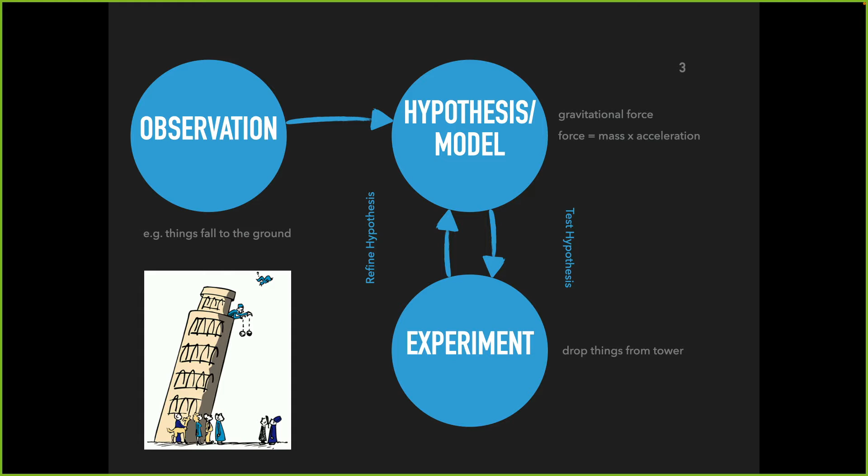So when you hear the theory of the Big Bang, it's kind of already been demonstrated or hasn't been proven wrong yet. So you proceed to do experiments to validate your hypothesis and try to disprove it, see where the limits are. You know, like drop things from a tower. Who was the guy who did that? Galileo, was it Galileo? Yes, Galileo. And by the way, then you refine the hypothesis. As you collect data, maybe there's an error here, maybe these are the limitations, maybe you cannot drop things from way up in the atmosphere or whatever.

Now, by the way, this is called the Tower of Pisa, not pizza or piazza. So it's the Tower of Pisa. Not pizza or piazza.

Okay, great. This sets the stage that to do science, you need to do experiments and you need to observe reality. And that's really true, and that's been true since the birth of science. However, how do you experiment on an exploding star, for example? It's really very dangerous. Nobody experiments on blowing up, doing supernovas at the university. You can't do that. Not only is it very dangerous, probably you cannot do that.

So how can you run an experiment? How can you study an exploding star? You can observe in the universe, but have you seen those pictures from even the best space telescopes? They're like 3 pixels. And they tell you, oh look, there's an accretion disk over here. And I was like, how do you see that? It's like 3 pixels. And we're like, yeah, you know what, this is all our theory, what it does. But it turns out that those pixels and whatever they're seeing are actually based on what we're going to talk about here today: simulation, simulation science.

So how do you experiment on a hurricane? You could do a scale model, but it's really hard to do a hurricane in a scale model. So it's easier to do it on a computer. How do you simulate a nuclear accident? You learn from history, because it's unethical to start a tsunami, for example, to cause a nuclear accident. It's dangerous. How do you experiment on a coal boiler? Something as simple as a coal boiler is really hard to instrument, because your instruments will burn instantly. So how do you get measurements and readings? Flameless combustion - I didn't know that this was a thing until like 6 years ago.

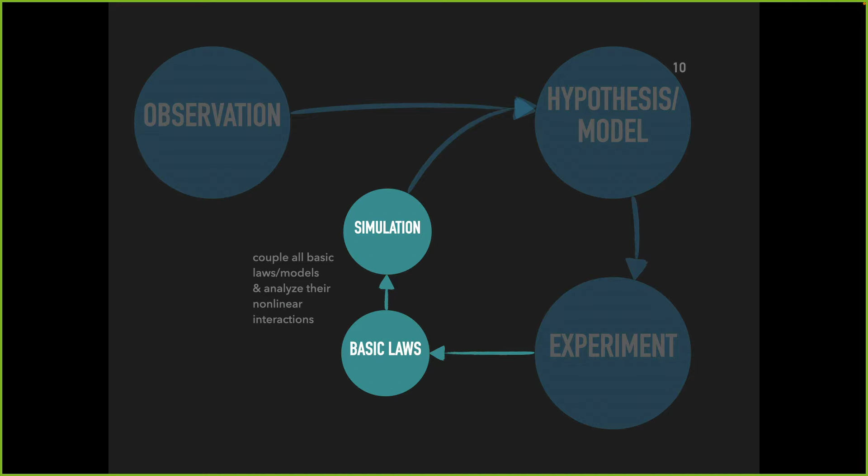That is where simulation comes in. It couples all the basic laws and models that you've deduced from your experiments and hypotheses, and you analyze their nonlinear interactions. Obviously there's a lot more that goes into it, because you need to make sure that the simulation is actually giving you realistic results, and we're going to talk about that a lot in this course.

More and more, this is generated by ChatGPT: it says theory is the first pillar of the scientific method, experiment is the second pillar, and finally scientific computing or simulation science is the third pillar of the scientific method. This is a testimony to the power of computing, really—it used to be just these two, theory/analytical methods and experiments.

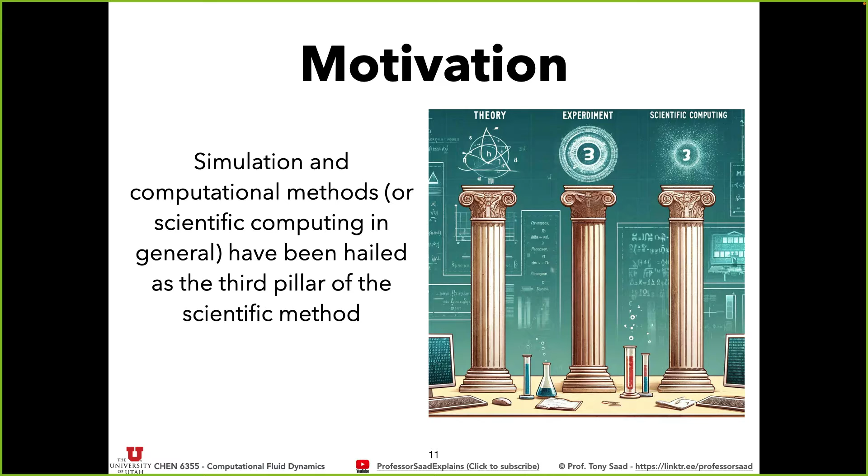Now, when you think about simulation, there's no simulation that touches your heart and your soul better than a fluid flow simulation. Seriously—why? Because it's in our veins. There's fluid in our veins, we move within fluids, the air, the water. You see a fluid simulation, it's beautiful, it's mind-boggling. That's why I love CFD too, because I want to make some cool simulations.

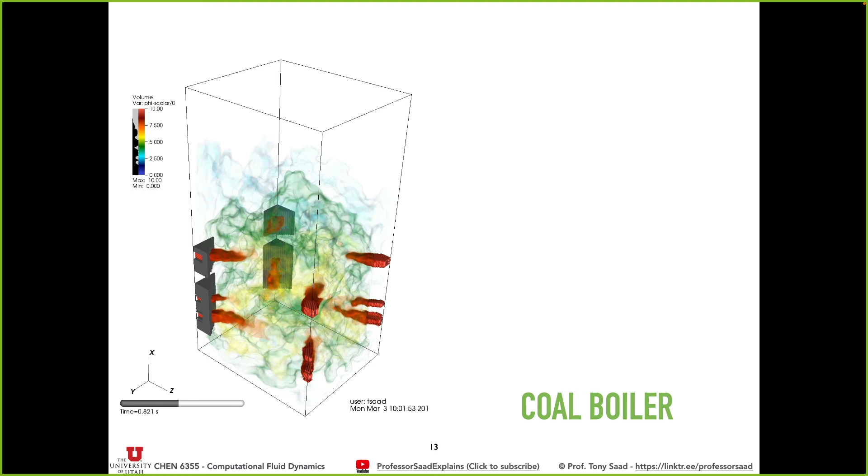I'm going to start showing you some eye candy, some of the work that me and my colleague have done over the years. This is an actual simulation of a coal boiler downtown that we were doing. What you're looking at here are injectors—these colors represent coal particles entering the domain. They're diluting, so the color represents concentration, and they're diluting and also devolatilizing and burning subsequently.

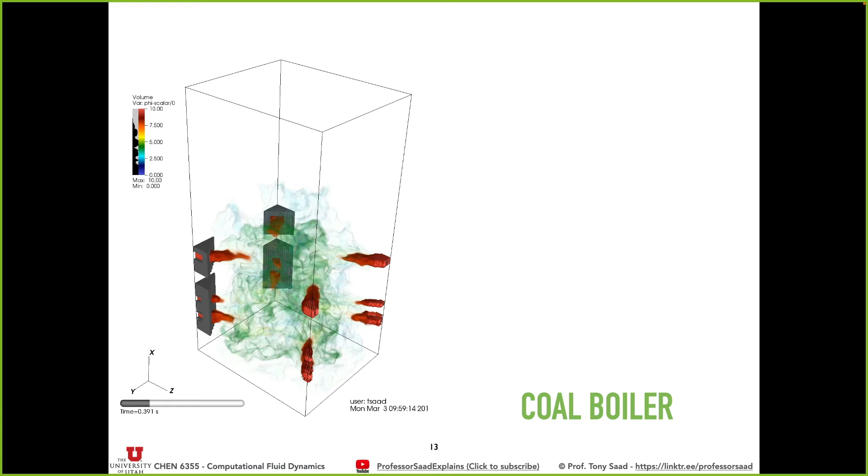So they come in—this is a 3D volume rendering. You don't see much, it doesn't look super nice. But what I want to do is take a slice over here on this plane. If I take a slice down there, we were able to get a picture of what we call the fireball inside the coal burner. These are tangentially fired streams with coal particles that come in, devolatilize, and burn.

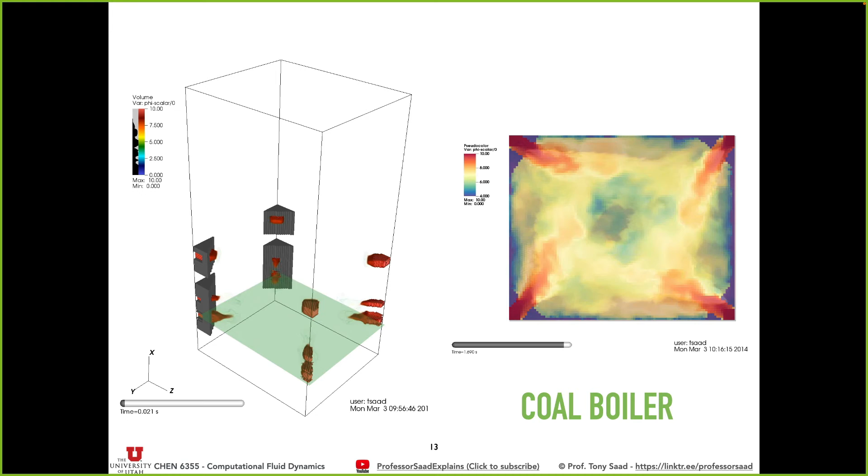And quantitatively, it is actually right on top of it. So we got that right. Isn't that cool to do something like that? That's pretty cool.

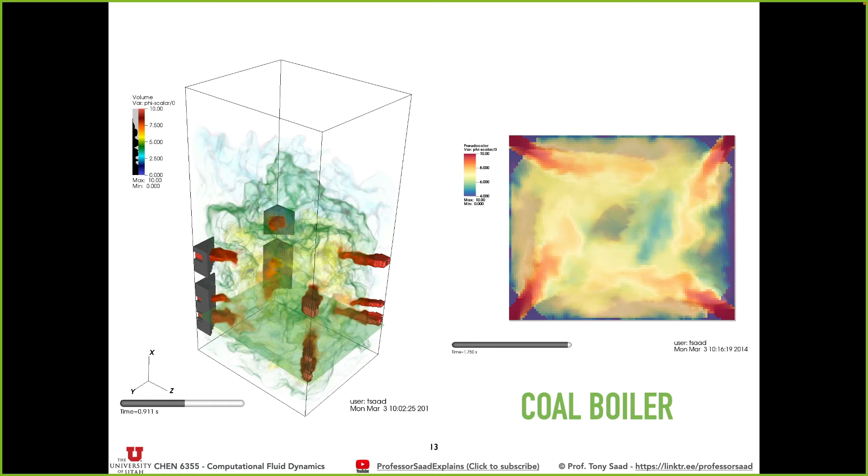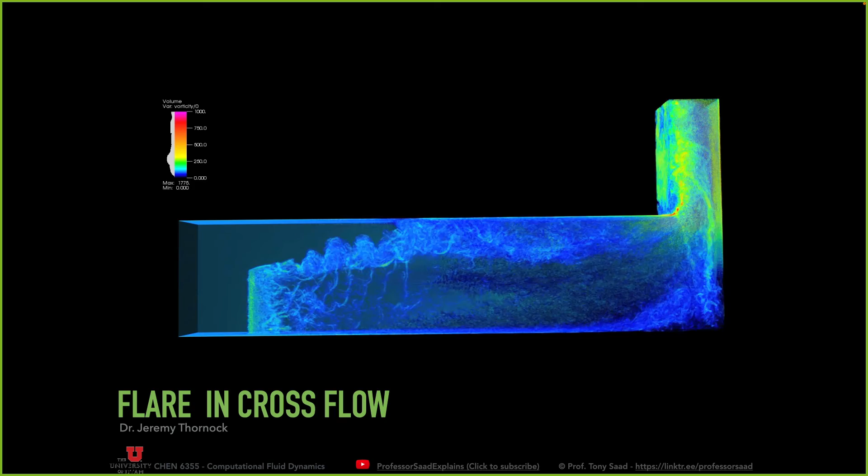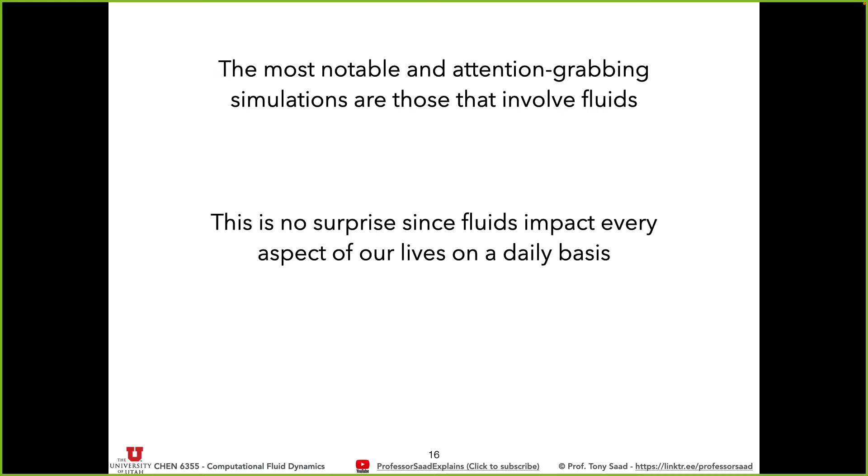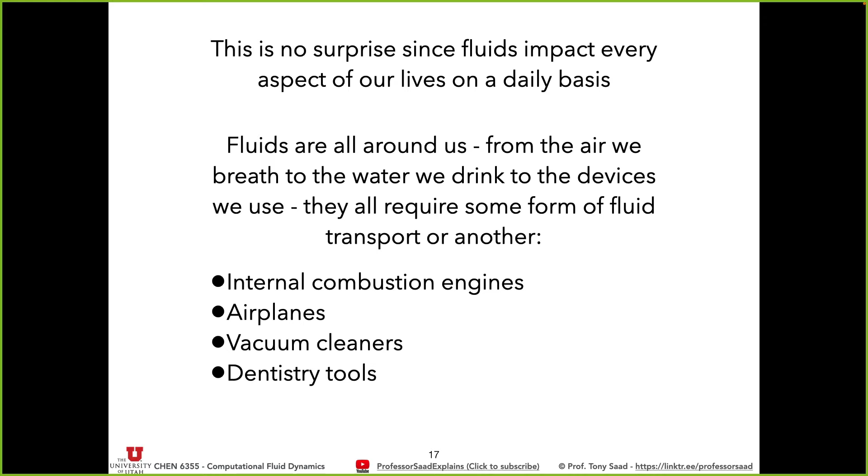Now it's no surprise that we like fluid simulations because fluids are in our veins, right? They're everywhere around us. I like this list: fluids are in internal combustion engines, around airplanes, in vacuum cleaners—I don't know why I chose that model—dentistry tools (I've been doing some dental work recently, so that was great inspiration), pressure washers and cleaners, coal boilers, etc.

So why do we need computational fluid dynamics? Beyond it being so cool, and I do CFD, why do we need CFD? It's because the behavior of fluids is very difficult to study and predict.

For those of you who took fluid mechanics with me in the fall, or even undergraduate, you recognize this is a complicated discipline. Nobody really understands fluids—it's like quantum mechanics. If you think you understand fluids, you don't understand fluids. There's so much complexity, yet the equations look somewhat benign.

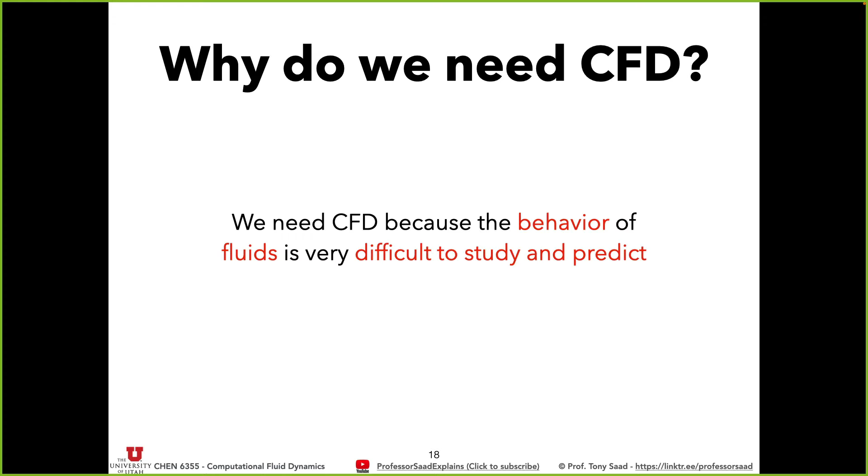But they're very complicated to predict because the equations don't tell us the story of what will happen in reality. They just have convection, diffusion, and pressure terms, but it doesn't tell you how to form a Kármán vortex or show reversible flow for Stokes flow. You can't see that directly from the equations—you have to set the problem up.

Now, since fluids are at the heart of many things, fluid mechanics is an important field to study. There are three ways to study fluids: theoretical, experimental, and computational. That's the scientific method, but now we're adding computational. We'll go through each one, trying to set the stage simply.

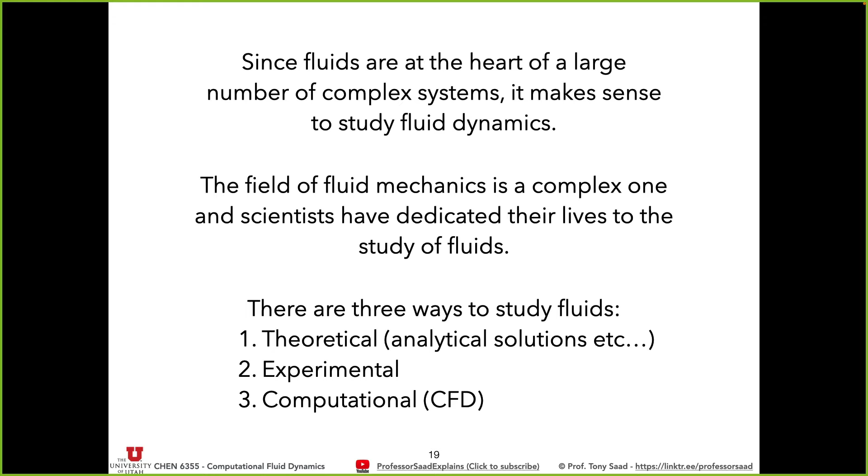Analytical methods are limited in scope to simple geometries—like approximating the chicken as a sphere and seeing what happens, or the giraffe as a cylinder. So limited geometry, but very insightful. Poiseuille flow, one of the most important results in fluid mechanics, tells you the relation between pressure drop and flow rate—it's a simple approximation like an infinitely long pipe.

Is it close to reality? Pretty darn close, but we have to add corrections to it. Still pretty useful, but that's the limitation. If you're trying to study the complex blood flow in your veins, Poiseuille flow isn't enough—it's more of a back-of-the-envelope calculation you could do while flying in an airplane. Anything more serious, you can't use analytical methods.

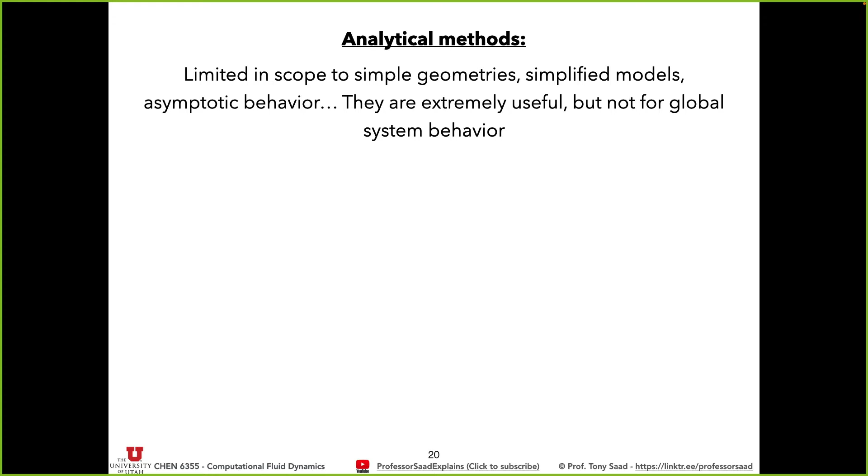Experimental methods are the most realistic—they're the truth, more or less—but can be expensive and sometimes dangerous or impossible. Like the example of the supernova—I really like supernovas—you can run a simulation of a supernova, and you can't run an experiment to reproduce one either.

Finally, computational methods are kind of virtual experimentation based on first principles. Remember the picture of the scientific method with observation and basic laws? We take those basic laws—mass conservation, momentum conservation, energy conservation—and put them together.

We turn those equations into something the computer can handle—little differential equations, finite differences, etc.—and then try to solve them. Now, they also suffer from numerical errors. There are formulation problems and other headaches that we will observe in this course as well.

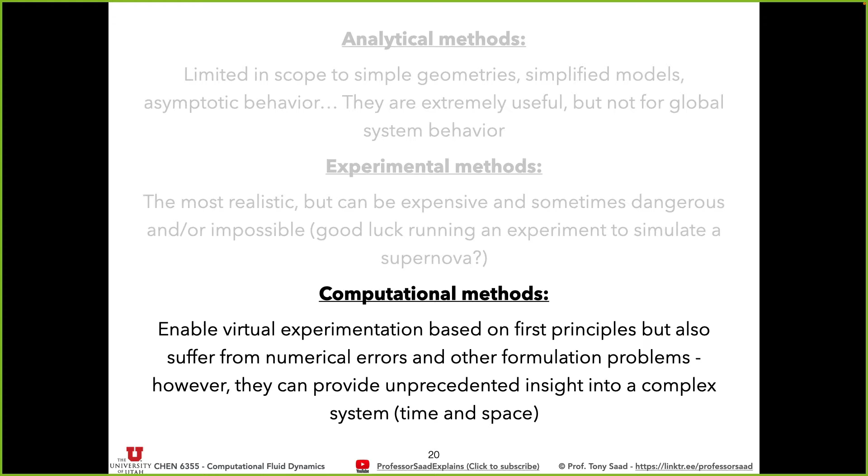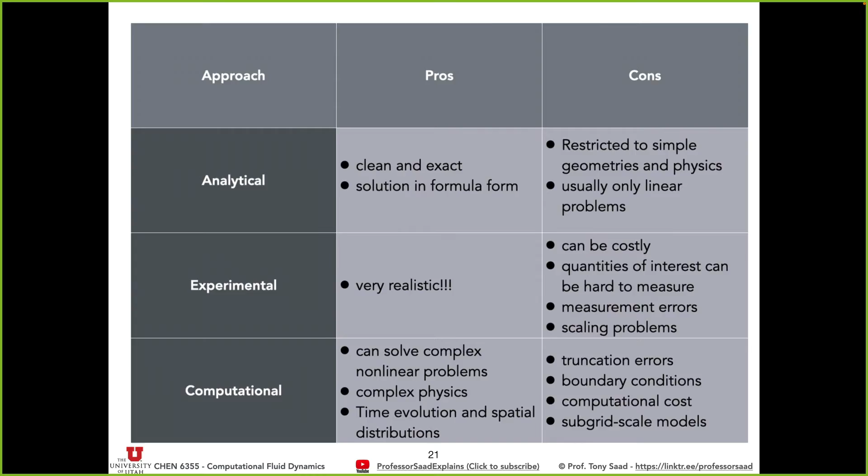And then you ask yourself, okay, what is CFD? Again, a picture generated by ChatGPT. I told ChatGPT, I'm teaching an introductory lecture on computational fluid dynamics today. In your opinion, what is CFD? If you want one image to describe computational fluid dynamics, what would you produce? And it produced this thing. It's pretty interesting. I don't know what's going on over here. Some weird multiverse thing going on, but okay.

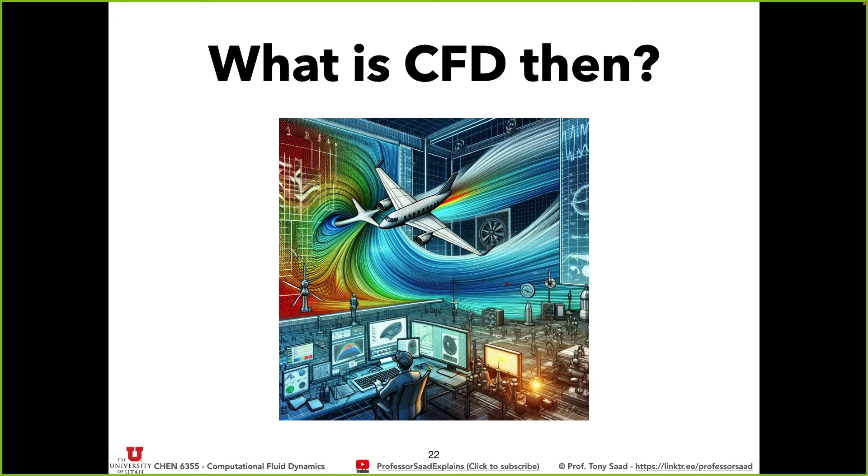There's a great definition that I take from Professor Gretar Tryggvason. He's a great teacher and educator of CFD. He was the former editor-in-chief of the Journal of Computational Physics, and a very dear friend. I learned a lot from him.

He says that CFD consists of computing multidimensional flows, 2D or 3D flows, by solving the Navier-Stokes or Euler equations. These really are the two sets of equations that we will be dealing with. Navier-Stokes could be fully compressible or incompressible. The Euler equations are just inviscid.

The Euler equations automatically, because of lack of viscosity, will form shock waves. When we get to that in the second part of the lecture, I'll explain how a shock wave gets formed in the lack of diffusion. If you think about it intuitively, diffusion tends to equalize things, just smooth things out, and convection is trying to move things very quickly. When you take diffusion out of the fluid equations, you just have advection. Remember in fluids you had this term multiplying the velocity by the gradient of the velocity, and that term tends to form shock waves. It's like moving the fluid in two opposite directions, and it forms a shock wave, or starts creating things that are spinning.

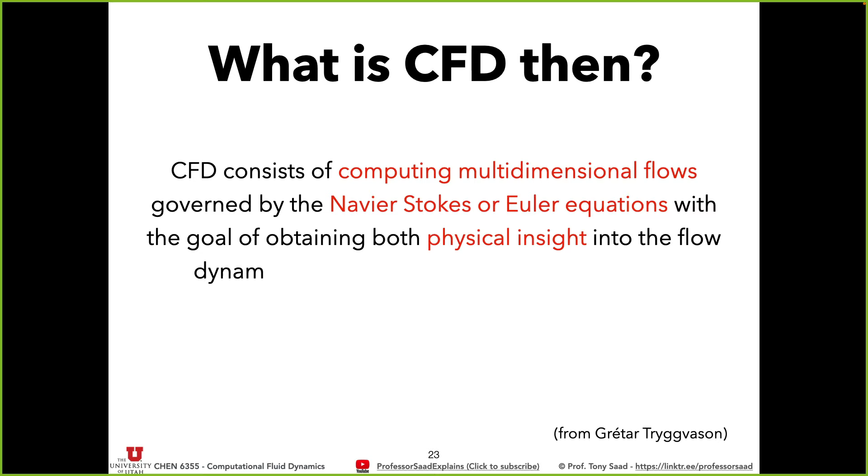Okay, let's go back to this definition: the Navier-Stokes equations, Euler equations, with the goal of obtaining both physical insight into the flow dynamics and quantitative predictions of engineering flow systems. Now, CFD is one part of a bigger picture. It is the most popular, by all means, because it is the most captivating, right?

You could show a molecular dynamics simulation, these particles that are just wiggling, these molecules moving in place, and it's not relatable, right? You see a fluid simulation and you're like, oh my gosh, this is beautiful. So it's just very popular. It became very popular, but it's part of a bigger umbrella of scientific computing, where you could have solid mechanics simulations, simulations in chemistry, physics, material science, etc. Fluids is scientific computing. CFD is scientific computing applied to fluids.

Now, we anecdotally call everything CFD, even when we're doing solid mechanics. They're just doing CFD, they're just doing CFD. And sometimes I call someone, I like your CFD. No, sir, this is molecular dynamics solving the Boltzmann equation. It's just all CFD, and so, yeah, I like to mess with people that way. But, okay.

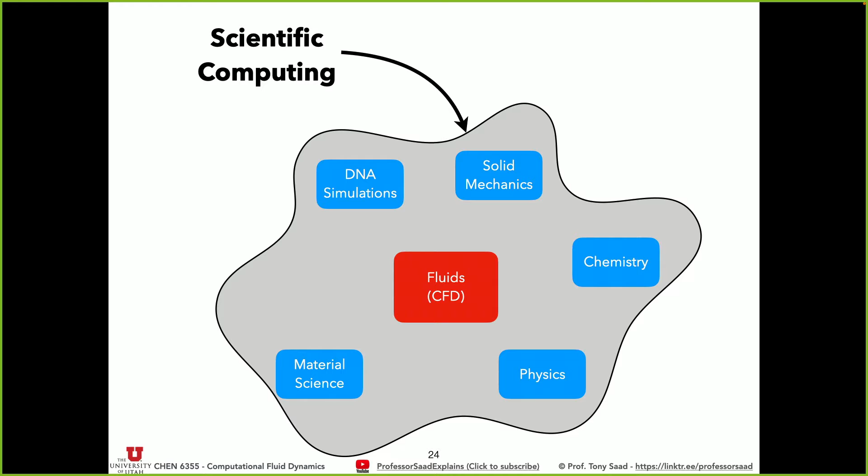Fluid dynamics gives you the equations and the physics, the understanding of the physics. Numerical methods show how we can take those equations and convert them to something that a computer can compute, and then putting those transformed equations into a computer. That's where computer science comes in, but not really computer science—though yes, computer science, because programming is not computer science, okay?

So here's the analogy: you can drive a car without understanding the internal combustion engine. You can be a programmer without being a computer scientist, and you should be, because programming is just a tool, it's just like a car. As an engineer, you need to know how to program—right, in this day and age that's the reality. It's already hard enough with AI, competing with AI, so you need an edge. In modern CFD, there's more computer science, because now we're trying to figure out how we can index an array—should we go in the IJK direction or JKI?

How is memory laid out? So you get into some mind-numbing computer science stuff that's beyond what we really need to get something working, but I call it computer science. I want to go through some historical perspective. Some of you might have heard of these words thrown around, but most of you have not. I like to have that historical perspective just for your own benefit.

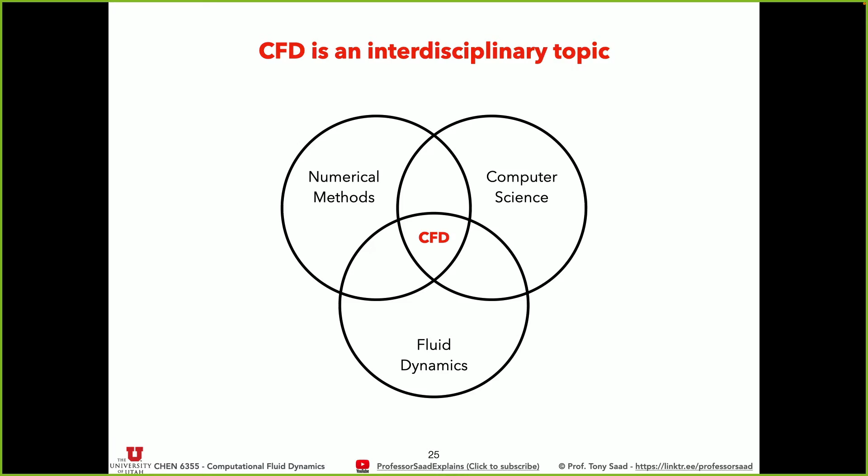If one day you're just kind of walking and bored, you grab those papers and start reading them, as you do every day, right? Just reading scientific literature. The first attempt at the calculation, and really you should try to download that paper. It's so cute, it's so hilarious because he did the calculation by hand.

Sir Lewis Fry Richardson, a British physicist and atmospheric person. Weather prediction was a big deal at the time. He's the guy who came up with that poem about turbulence: big whirls have little whirls which feed on their velocity, and little whirls have lesser whirls, and so on to viscosity. So, Lewis Fry Richardson.

This article, 'The Approximate Arithmetical Solution by Finite Differences of Physical Problems Involving Differential Equations, with an Application to Stresses in a Masonry Dam.'

And then he has a paper about weather prediction right here. I want to see, I think it's on the next slide.

You have a bunch of papers early on in the beginning of the 20th century. Early on, 1910, 1924, you start seeing 1928, 1930, a numerical mathematical analysis.

This particular paper, let me see if it's on the next slide. It's not. But this particular paper, also by Richardson, 'Weather Prediction by Numerical Process.' I don't have it listed here, but I have a copy of it actually.

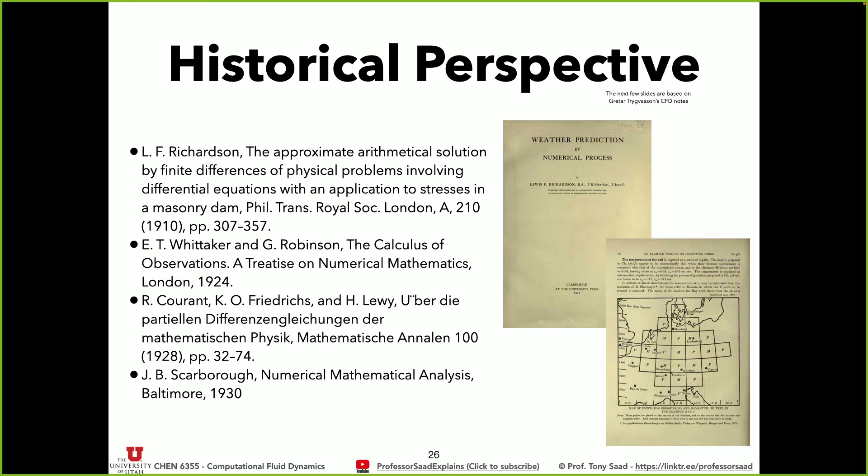It's not more sophisticated than that. So if they can do it in 1910 or 1920, we should be able to do it now. We have much better tools now.

And then there's a bunch of papers that I'm listing here also out of completion and for the sake of the historical perspective, because I want to get to the 70s. It's really in the 70s where CFD truly took off in the modern sense.

Here we were just trying to apply, okay, what do you do with the finite difference method? Can you solve these equations? They were mostly interested, as we got close to the Second World War, in understanding ballistics, in the air and aerodynamics and all of that stuff. So there was a lot of work on the Euler equations, the inviscid equations, which are very hard to solve because they form shock waves. A lot of the shock capturing methods, if you've heard of that word, come from this work.

Iterative solutions of finite difference approximation to elliptic equations. Again, Richardson, stability analysis for PDEs. This is where the Courant, Friedrichs, and Lewy condition in 1928, the CFL number, the Courant number, if you've heard of that, comes from. 1928, and it's still taught to this day. It's at the foundation, and I will teach you that as well.

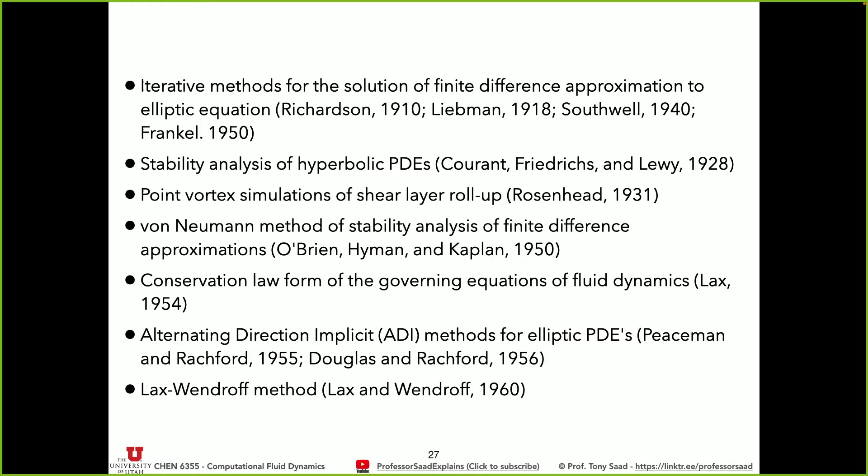All sorts of methods trying to understand how to solve the Navier-Stokes equations or variations of the Navier-Stokes equations. At the same time, there was development into the theory of boundary layers, etc. If you remember in fluids with Blasius and Prandtl around that same time, everything, all that stuff coming along together. The product of its time.

But CFD in the modern sense really started with the formation of the T3 group at Los Alamos National Laboratory. Early development in the group focused on compressible flows because they were trying to understand aerodynamics, flying at very high speeds. Really, that's what set the US apart from the rest of the world, even to this day, in air superiority. There's no country that matches the air superiority of the US because of the understanding and knowledge we have for compressible aerodynamics.

The first method was particle in a cell, or PIC method, from 1955. We're not going to learn that. This method evolved significantly, and then they tried to do some low-speed flows.

They had issues with the pressure because, as we will see later, there's no equation for the pressure when the flow is incompressible. For a compressible flow, you have momentum, continuity, an energy equation, and an equation of state, so you have all the equations for all the unknowns you need. When the flow is incompressible, you don't have an equation for the pressure. You just have 4 equations and 4 unknowns, but no equation for the pressure. So how the heck do you solve for the pressure?

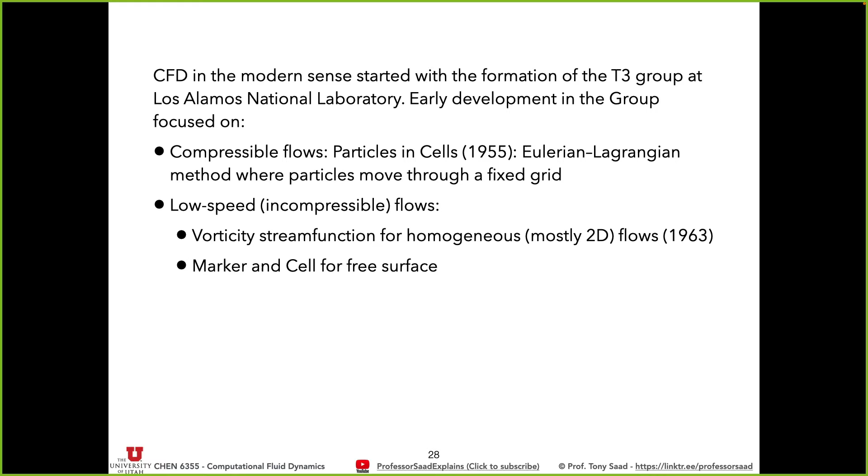They didn't know, so they came up with vorticity stream function formulations. Then they came up with the marker and cell method, which was the precursor of the staggered grid, which we will learn in this class as the best method for doing computational fluid dynamics. And then all-speed flows with an implicit method called ICE, and arbitrary Lagrangian methods. These are words.

I don't even understand all the methods presented here. Like, I know how ICE kind of works, but I don't know it fully. But I can learn it, right? So you're not going to learn ICE or ALE or free surface flows here, but you will learn enough so that when you go out and do a new application, you know the language and the terminology, and you can apply yourself to those methods and learn them and apply them.

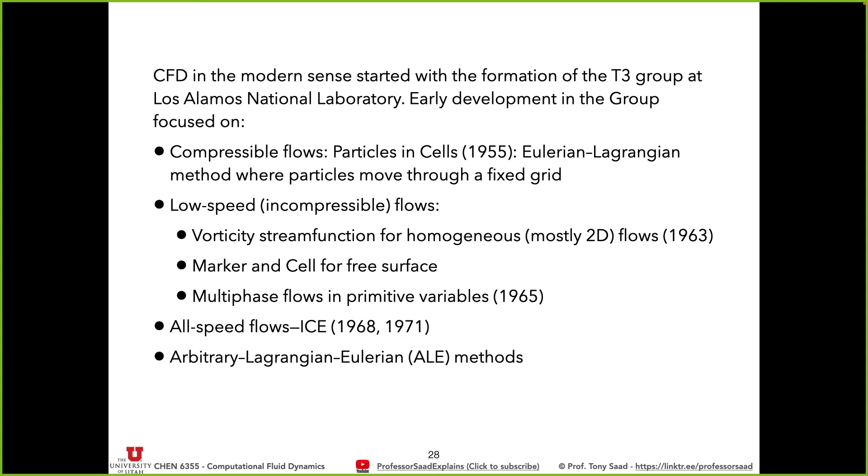All right, okay, some of the early development, and I think this was ASCII art. This is a flow over a blunt object from Harlow, also kind of well known in computational fluid dynamics.

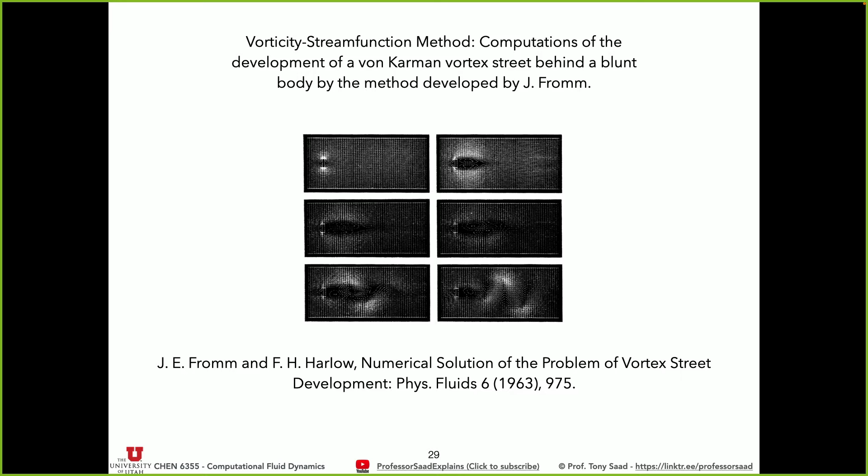The MAC method, which is the marker and cell method, which was the precursor of what we call the staggered grid. Again, it's a very important technique that we will use in this class. It used to be called the marker and cell method.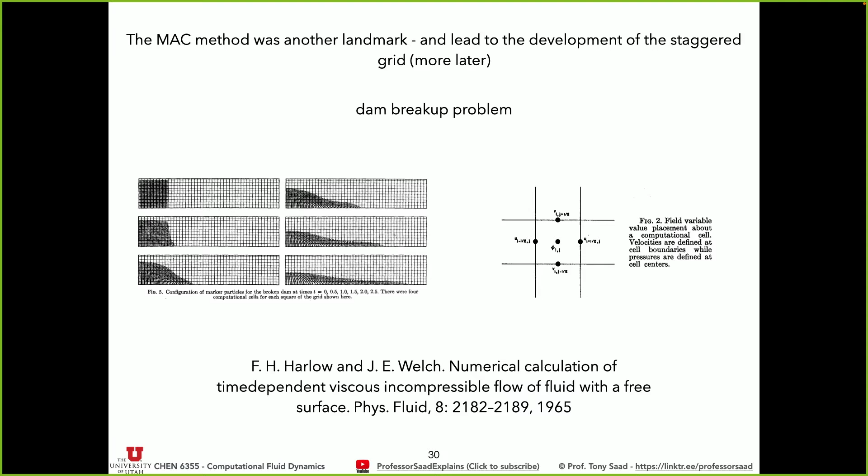This was also featured in Scientific American, Computer Experiments in Fluid Dynamics. Can you imagine that? That was a big deal, really big deal at the time.

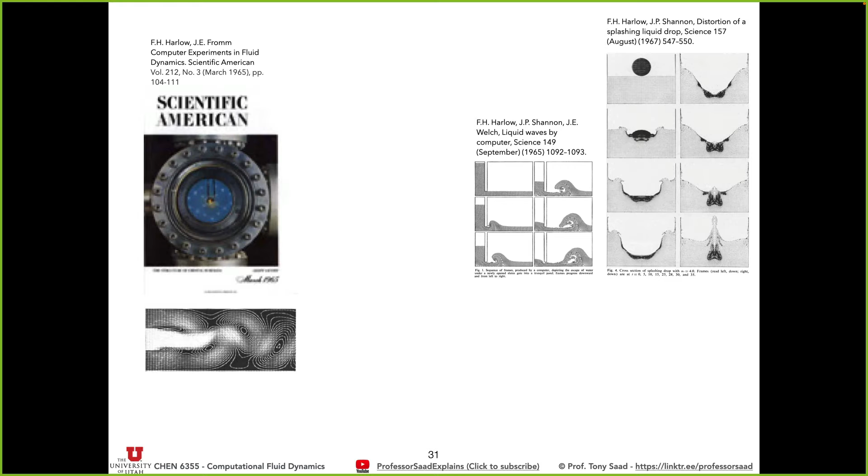Now, I have an excerpt here from a memoir by Harlow, who's the guy behind many of these methods, the marker and cell, etc., Francis Harlow. It's really fascinating, published in the Journal of Computational Physics in 2004. I'll read a little bit with you. Again, I won't bore you with these details, but I think they're kind of important to appreciate where they've been and where we are right now, as we take CFD for granted.

So many of these results were published in reports and journal articles, but not without some opposition. There was, for example, a conversation reported to me which took place around 1955 between two upper-level managers of the theoretical division, one of whom said, 'Look, what is this stuff? What are they doing in this group, the T3 group, which was supposed to be doing CFD? This PIC, particle in cell method, that they're trying to publish a paper on will never work.'

That's the worst statement you could make. I tell my PhD students, when they come and tell me this cannot be done, I tell them the fact that you cannot see it only means that you cannot see it. It doesn't mean there's no other way to do it. Never say it will never be done. Don't be on the bad side of history, you know?

Okay, so seriously, did you know what one of Lord Kelvin's biggest quotes is? Nobody talks about it, but I have it in my dissertation. He said, 'Machines heavier than air will never fly.'

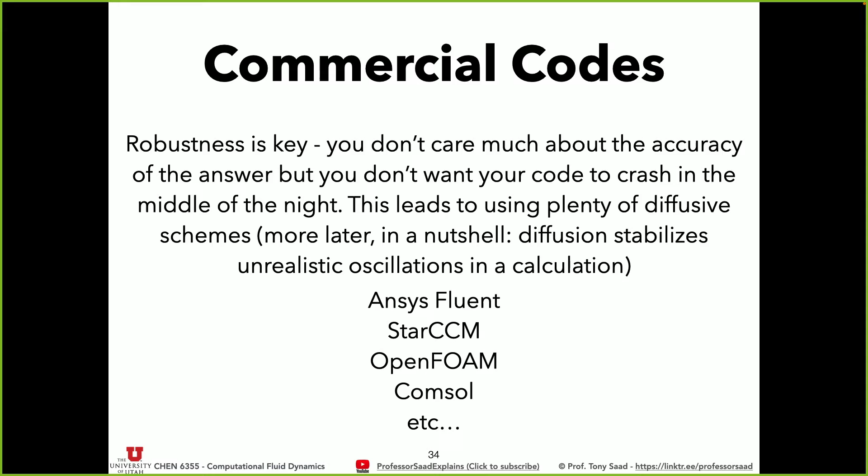Today things are different. CFD is more respected and is actually part of an engineer's arsenal. In many cases, they would ask us in a publication, where's your numerical validation? Which is great to hear. Okay, they did experiments, they did theory, but where's the numerical validation? Did you try more complicated cases with your numerics? Why didn't you solve the harder equations? Why did you solve this simplified model? You could solve more, so do the full model. It's a good thing, but why did it become more respected? What changed? It was really computational power.

This is from 2021. There's a website called top500.org. This is not the most recent, but it ranks the top 500 supercomputers in the world by order of how many floating point operations they do.

So what's a floating point operation? It's anytime you do something with two numbers: addition, subtraction, division, multiplication. You could say multiplication is more costly than an addition, but on average, typically, just call them one flop, one floating point operation. So anytime you have a division, multiplication, addition, or subtraction, you have a floating point operation. The more floating point operations you can do per second gives you a measure of how strong the computer is.

So what you're looking at here is in teraflops. This is 442,000 teraflops, this Fugaku Japanese computer. Then Summit and Sierra from IBM come in the US, and then Sunway in China, and so on. The list has been updated in 2024, but I couldn't find a plot in Statista to do that.

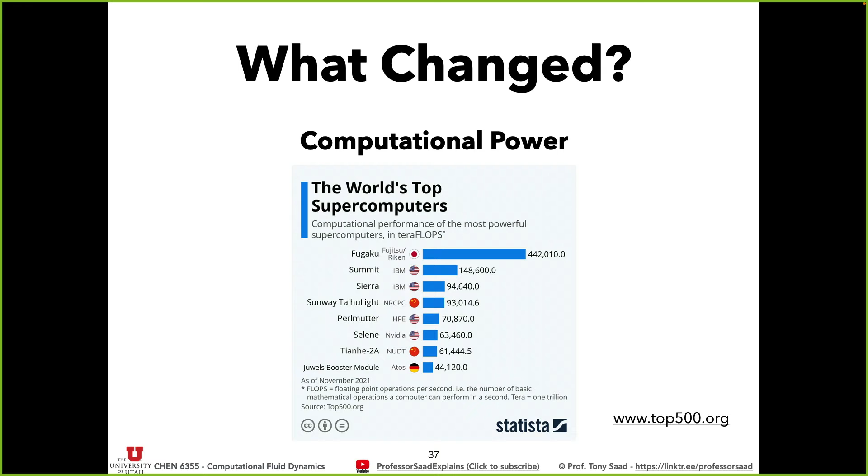So what are the ingredients of computational fluid? What do you take to make this? Obviously, tomatoes and vegetables and bell peppers and things like that. So what are those ingredients? There's like 3 simple steps, and each one of them is going to take hours of lecturing and study. We need to identify the physical process we're dealing with. So we'll discuss that next, like is your flow laminar, turbulent, compressible, incompressible, etc.

Figure out the mathematical model you want to use. Are we going to use variable density or constant density? Are we multi-phase or single phase? Is species diffusion important? Is this flow reacting? Are the reactions important or not? Identify a correct mathematical model, and finally develop the numerical model, put it in your code, write a code for it, or just use it in your code if it's already available, and do a calculation.

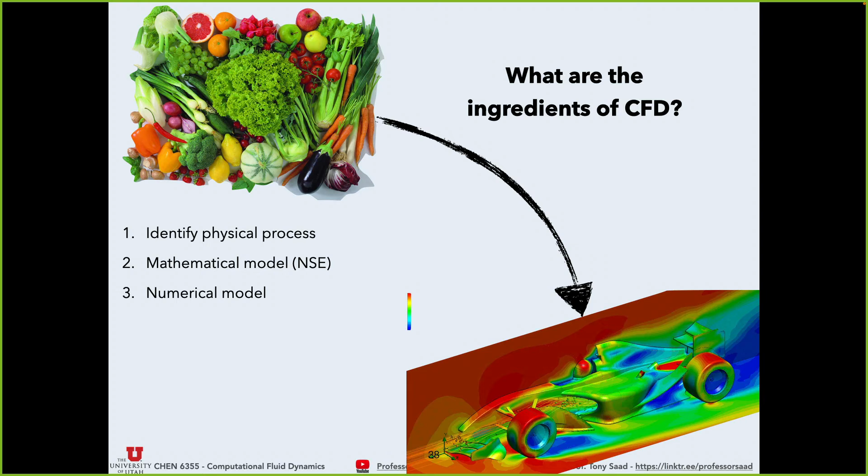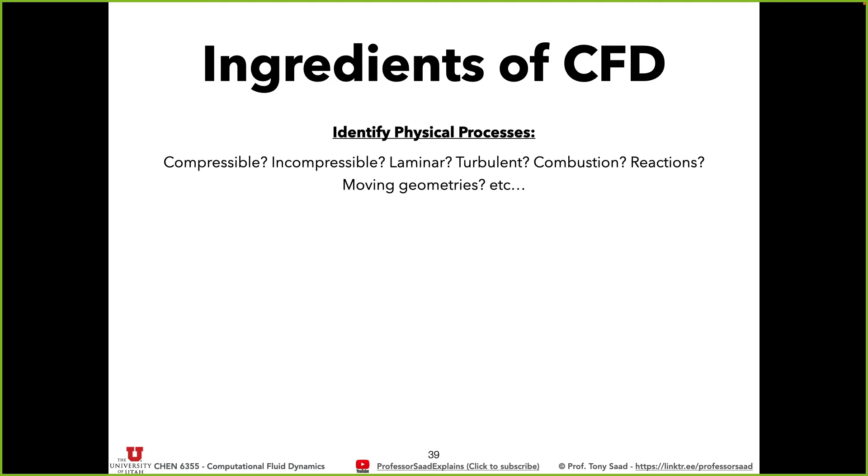So identify the physical process. Is it compressible, incompressible, laminar, turbulent? Or is there combustion? Are there reactions? Are there moving geometries? Then develop the mathematical model and the solution algorithm, usually a set of partial differential equations. Those are Navier-Stokes or Euler equations by definition, because this is computational fluids. So you'd be dealing with the Navier-Stokes equation.

In this class, we will be dealing with the incompressible Navier-Stokes equations, at least initially, so that we get you moving in the right direction. In your project, you might choose to do a compressible calculation if you want, if we have time. We'll cover some of that also at the end of the semester. But for now, we will be essentially focused on laminar incompressible flow. Turbulent flow is a piece of cake once you know how to do laminar incompressible flow.

Now, this step could include additional assumptions: symmetry, constant coefficients, etc., and also the algorithmic steps needed to solve the model. So we will learn about the method called the projection method that allows us to find an equation for the pressure.

Remember, I told you there's no equation for the pressure. Bear with me, I'll solve the equations in a second, and finally develop a numerical method and algorithmic procedure to solve these equations. Usually it's either finite difference, finite volume, or finite element methods. There's also spectral and boundary element methods, but those aren't as popular or robust as finite volume or finite element methods. In this class, we'll start with finite differences. I'll explain my philosophy in a minute and get to finite volume methods.

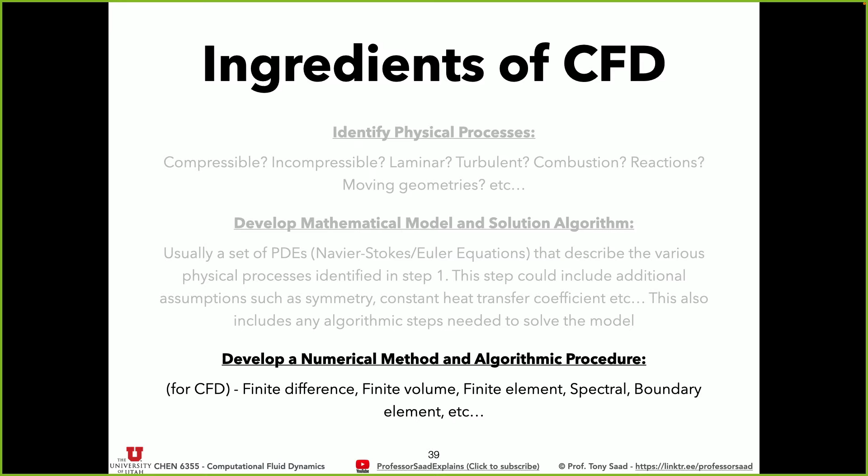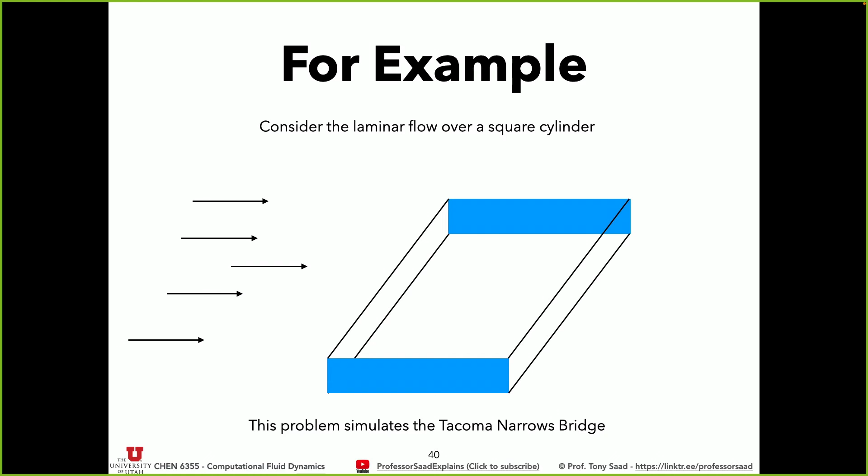Here's an example: consider the flow over a square cylinder. This is a problem I did in my undergraduate thesis project, and I was fascinated by how, if you remember the Tacoma Bridge, which was a problem in graduate fluid mechanics—this is a famous bridge that collapsed in Tacoma, Washington. In 1940, it just started vibrating, oscillating, and then it collapsed. Let me show you the video.

We solved this problem in graduate fluid mechanics. It was a nasty homework assignment.

This is a fluid structure interaction problem, but it was primarily driven by the airflow—the crosswinds across the bridge caused these oscillations, and it just caused this feedback loop, and the bridge collapsed. Let me see if it's any longer.

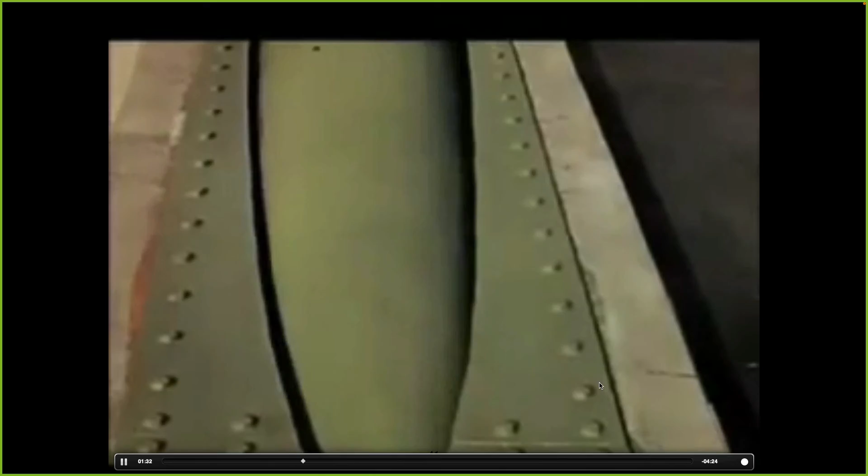Like what, 17? Okay, so let me—okay, here's the collapse, okay? Total collapse. Love the exclamation mark. All right, the whole thing collapsed. Okay, all right, so let's move on.

These are the equations that we will be solving, okay? I will explain—we will derive them in an intuitive way. We'll spend one lecture deriving them, but they're just equations, just differential equations. These are the Navier-Stokes equations for an incompressible laminar fluid with constant properties, so constant density and constant viscosity. These are shown for a three-dimensional flow, so you have x, y, and z directions. For practical reasons, we are going to do the two-dimensional version of those.

So we will cut down one equation and one unknown. There are four unknowns in these equations: the u, v, and w velocities. Those are the speeds of the fluid in the three different directions. What is the speed in the x direction? Call that u. In the y direction, call that v. In the z direction, call that w. Okay, so those are u, v, w.

But there's also this p, pressure, which we don't know. So what is the pressure at every point? Given some conditions at the boundaries, how does the pressure change in this room or as the flow is moving? Mu is viscosity, it's constant. Rho is density, it's constant. We'll explain those terms later, but you see kind of a lot of nonlinearity over here.

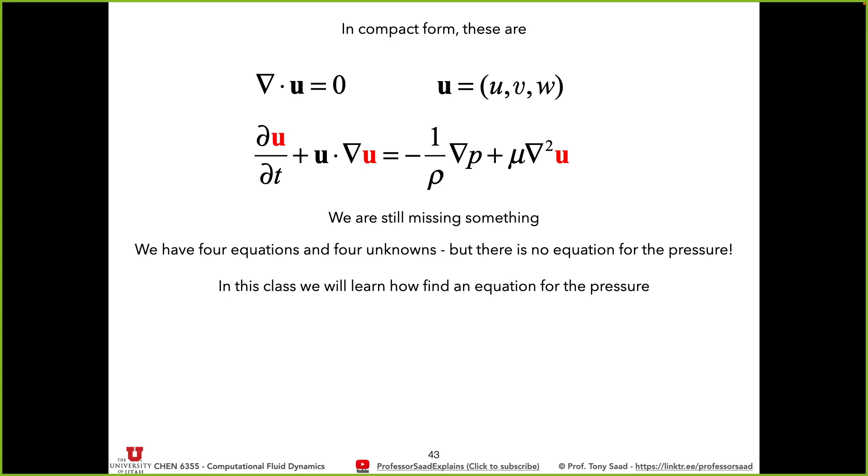But what I want you to focus on here is that, okay, I can solve this equation. Let's go back here. How do we solve these equations? It's frankly a nightmare because, let's say I can solve the first equation for u, the second equation for v, the third equation for w.

But where is the pressure? Could we use the first equation to solve for the pressure? But there's the pressure in the second equation too. Why not use the second equation? No, you should use the third equation to solve it. Can you combine them to solve for the pressure? What about this equation, we haven't used this equation yet. You can't use this equation to solve for u, v, and w because they're equally important. You can't actually invert that equation. It turns out that, no, we're going to need these equations to solve for u, v, and w.

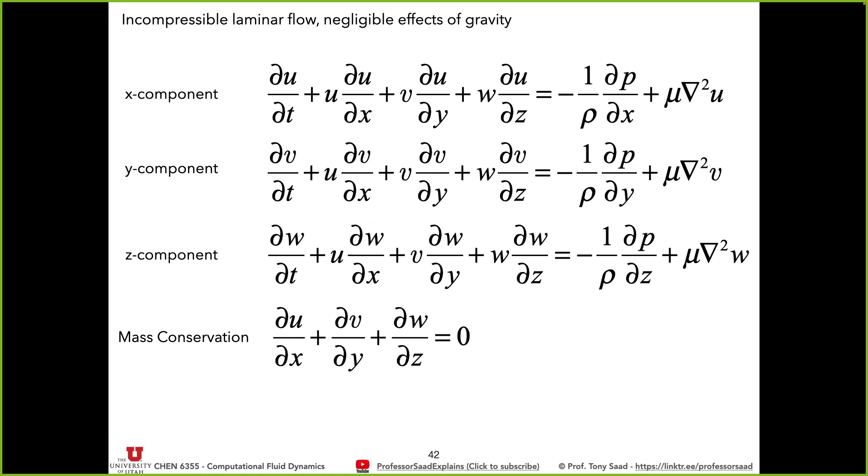And we're going to convert this equation into an equation for the pressure. It turns out that for incompressible flows, the pressure is your free parameter that allows u, v, and w to satisfy this equation. And that's the method that we will learn in this course to solve these equations.

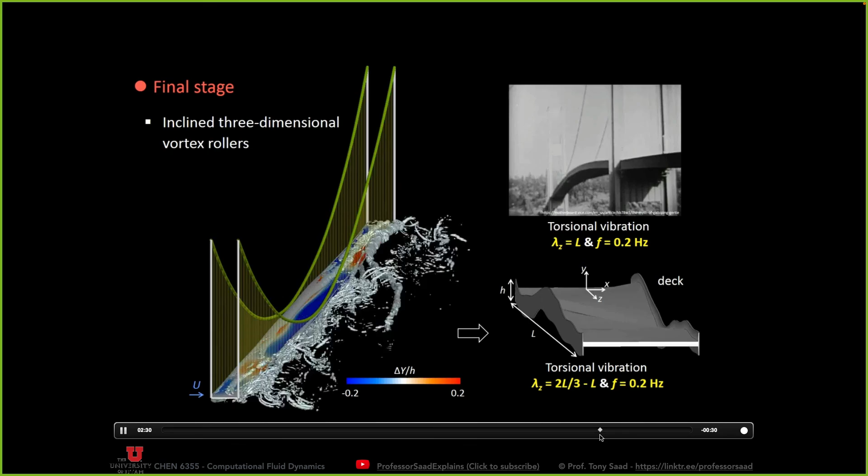This is another paper about a full fluid structure interaction simulation of the Tacoma Narrows Bridge, showing the oscillations. So you can see in their fluid structure analysis how they did this.

Anyway, okay, now you do CFD. Let me just make sure I'm good on time. Okay, very good on time.

There's two steps also in CFD that people don't talk about, and I hope we'll have time to talk about them. We might be a little shy on talking about those, but they're important, and they're called verification and validation. They're different, don't confuse the two with each other. You've probably heard those words thrown around, but they have very distinct meanings.

Verification answers the question: does your code solve the model you proposed? Not any model. You ask, okay, I implemented a model to do Fickian diffusion, does my code solve that problem? That's the only question verification asks. How faithful is the software implementation to the original mathematical model? Are you adding new terms in the model just to fix things? Oftentimes you end up trying to hack your boundary conditions, and by doing so you actually mess up your governing equations, and you're not solving the equations you thought you were solving.

So that's verification. Verification doesn't check if your numerical simulation is actually related to reality at all. It doesn't matter, I don't care. I could have a spherical chicken in space or going into a black hole, which never happens, right? There's no chicken flying into black holes.

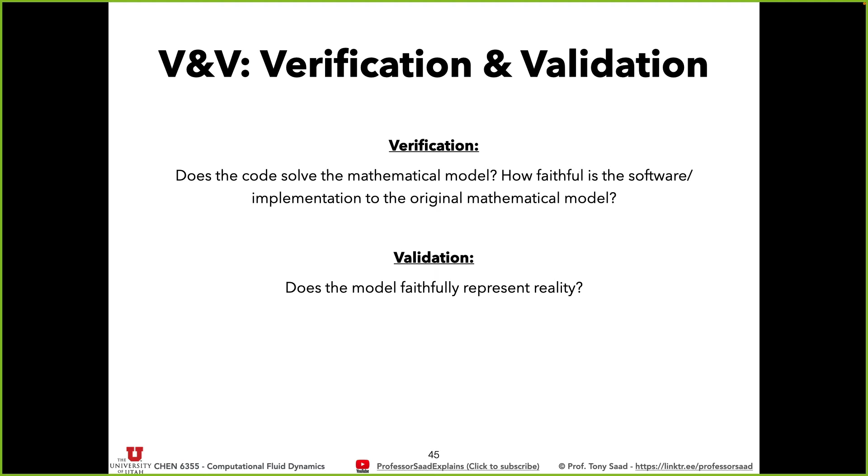All right, so now the question that everyone is waiting for me to talk about: what do I need to do CFD and to do well in this course? I want you all to learn, okay. This is not an undergraduate course. I want you here to want to have a discussion, we want to learn. I'm assuming you're all coming here by choice and motivated to learn about the material. But I'm not going to sugarcoat it either, because it's one of those fields where you have to know certain things to do the bare minimum in computational fluid dynamics. You need to have a strong knowledge of fluid mechanics, okay?

Now, I know some of you have not had advanced or grad fluids, or haven't had fluids at all, okay? The strength in knowledge of fluid mechanics comes when you are interpreting your results.

So when I first taught this course, we had a heated driven cavity, which is going to be your first project. You're going to do a driven cavity with flow inside it. We're going to heat it on the sides and have convection streams coming up, causing buoyancy and all sorts of interesting things. The lid was moving in one direction, but their flow was in the opposite direction. Now, they knew fluids, and they should have said this doesn't make sense, right? That's the extent where I say strong knowledge of fluid mechanics is being able to interpret if your results make sense or not.

Now, is this going to matter so much in this course? To a certain extent. But if you're able to accept the equations I showed you previously and my discussions about them, and ask questions about why this term looks like this or that term looks like that, you'll be fine. This is specific to the junior students. You can also check my YouTube playlist on fluids. It's a big discipline, okay?

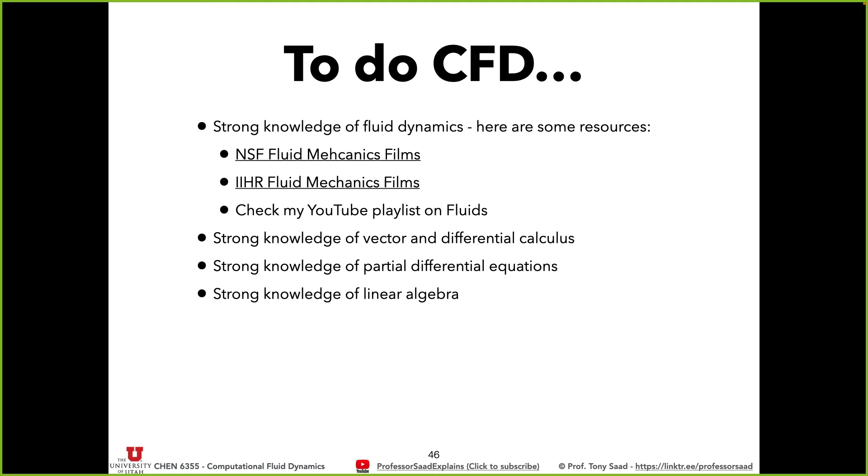Programming, all right? We will use Python, almost exclusively in this course. And there are reasons why I use Python. First, it's free. It is the programming language of the future, at least for the next 5 years. So it's good to know Python, right? It helps you to know Python.

And with Python, we can get these really cool Jupyter notebooks. These are documents — if you haven't done Jupyter notebooks before, they let you mix text, equations, multimedia, and code in one document. So you don't have to write a report separate from your code, separate from your figures. You can put everything in one document. Everything is self-contained. So that's why I like that.

All our codes will be done in Jupyter notebooks. Now, all you need to do is download Python to your computer, and download the Anaconda distribution — that's the one I recommend. Just Google Anaconda Python. If you have Windows or Mac, it should just work. Open the Anaconda thing, there's something called Jupyter Notebook. Just see if it runs, if it opens up. And that's it.

Now, do you want a course on Python to be able to do this? No, please don't take a course on Python, okay? Definitely not in computer science, because this is not a computer science course. This is a tool, okay? What is important in programming — this is my philosophy on programming, and my numerical methods students know this.

Just like language, there is language and there's ideas. Language expresses an idea, right? If you think of language, it's like the clothing or the ornaments around the idea. But an idea transcends all languages. I can express the same idea in French, English, Spanish, Arabic, whatever — those are languages, but the idea is the same. So what matters is knowing what idea you need to do.